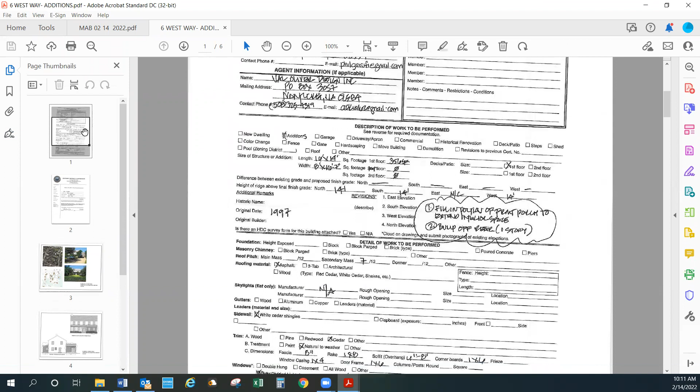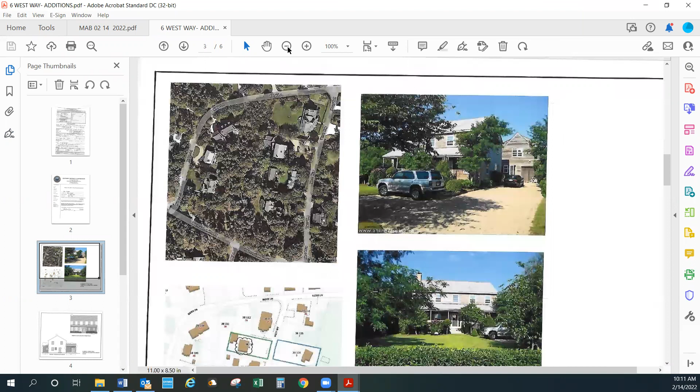Okay, he is adding an addition on West Way. Yeah, there are 2 additions on the house. Yeah, I know this house. I have no problem with it.

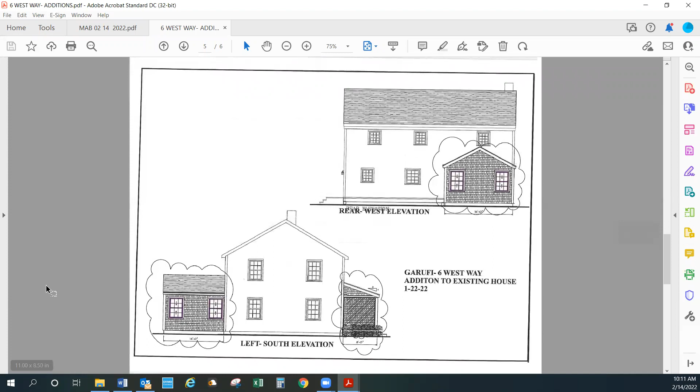Okay, might as well just roll through here for a second. Esmeralda, you got to move it to the left because for some reason my block of people's faces always blocks that right-hand side. Okay, go down one more. Do we not have all 4 sides here? Yes, oh there we go. All right, nobody has any concerns? I reviewed it and have no problems.

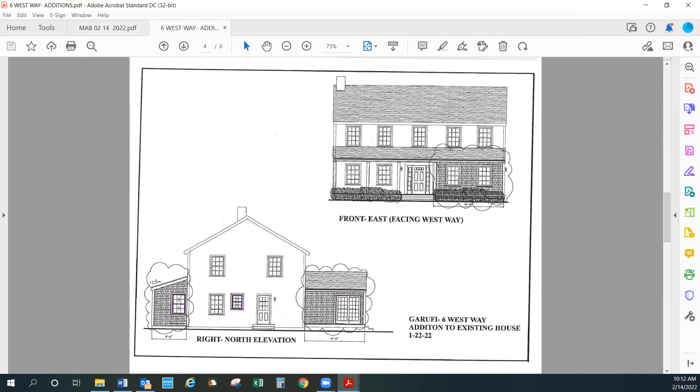So sorry, does somebody want to make a motion that we have no concerns? So I'll make, moved, this is Tom. I'll make a motion that we have no concerns. Okay, is there a second? Okay, all those in favor, Tom, yes. Bruce, yes, and myself, okay.

All right, number 2, we got 3 things going on here, on Washington Ave. Yeah, that's Bordis's house, you know, that big crooked house, just down by the boatyard. Yep, okay. What are we seeing? What's up here first, the pool? Correct. There is the pool, window well, and a new garage.

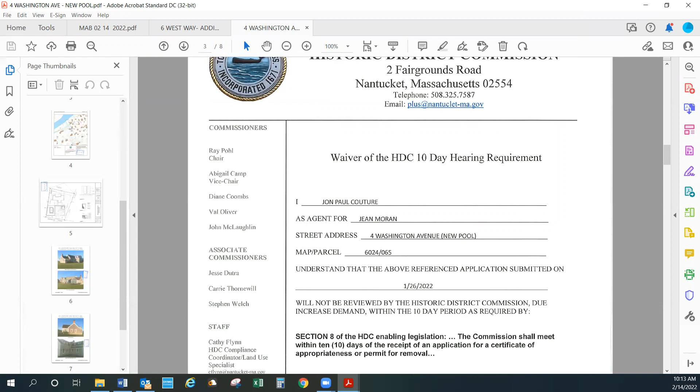All right, let's go to, what zone is this? Can you go back to the application page? Yeah, all those houses, Moran's, all those houses are owned by the family. Are they owned by the family? Oh, he was already here.

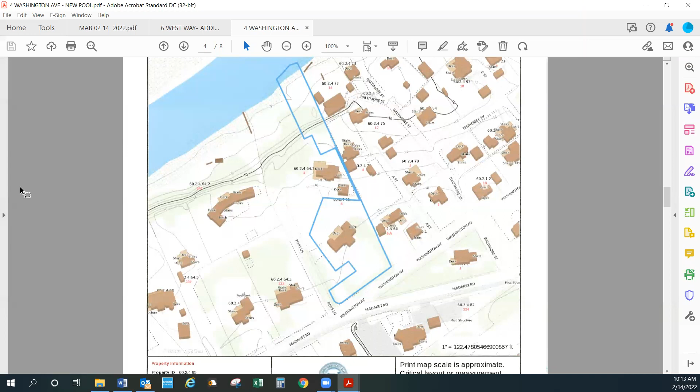Yeah, coming back to the application page for a second. Actually, talking about that particular thing. Oh, was it? I got a voicemail from him saying he can't get on his computer for email. I said, go over to VR, they're gonna have to go to the zoning board for that. But we'll look at it.

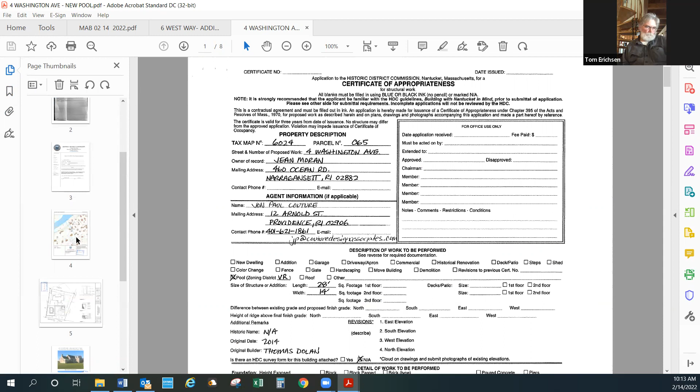All right, the site plan? I have a lot of background noise. What's going on? That's in Esmeralda's office. It's almost impossible to keep the noise out because she's in the office with other people. Cool.

This is what are you looking at first, the pool? Yeah, okay, I have several issues with the pool. All right, let's stay within our lane, go ahead. Number one, the pool has to go to the zoning board, correct? Yeah, but it doesn't matter what we do, the zoning board's gonna make it go to us before it goes to the zoning board. I've already been through this 4 times out there.

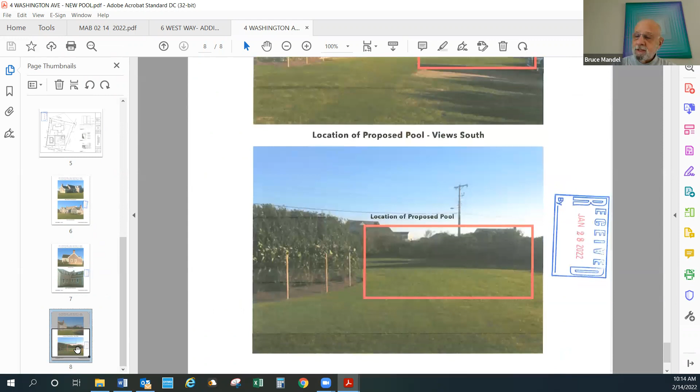Okay, number one, the plan calls for the installation of a 5-foot-high chain link fence supposedly concealed by non-indigenous privet. So I got two issues with that. Number one, that kind of a fence is visible and it's not in keeping with the neighborhood. And the fact that they're going to plant some non-indigenous privets around it, they don't say whether they're going to be small and then grow over the years or what, but it just is not consistent with what we're trying to do in this neighborhood.

Would it make a difference? Hold on, let's stay on one thing. Would it make a difference if it was year-round plantings?

I agree with Bruce. Year-round planting, a privet is year-round. No, it's not. It's only good for three months of the year. Oh, I didn't know that. Well, that's another factor.

They should definitely have those bushes around the chain link fence. What they mean by chain link fence is that this is pool fence embedded into a hedge, and everybody uses it here without having to put a big heavy duty fence around. Everybody's using this webbing in between all the hedging. Problem is that it's in privet, which is going to be useless.

If you go to the detail in the upper right-hand corner of this drawing, Esmeralda, can you drop it down? Move it to the left. Yeah, see, this is normal. They put this pool fence in between a double row of privet. However, most of the year, it doesn't do jack.

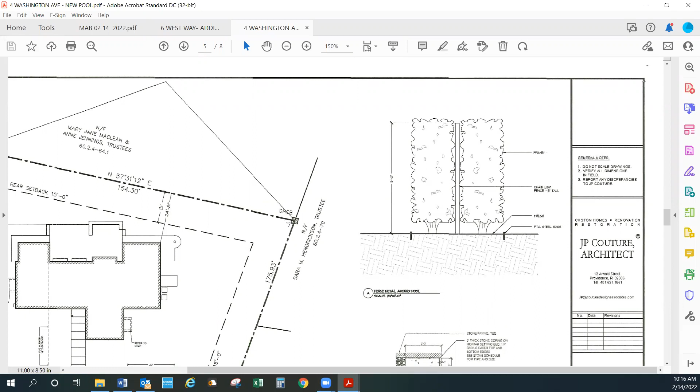Not only that, but Linda, that's not around any fence. That's not around any pool that I have seen in Madaket. I've seen it, but it's usually not on the road side. That's the biggest issue - it's on the road. It goes around the front yard, around the pool, and all around the rest of the area.

Well, does anybody besides me have a problem with where the pool is located? I don't think they can locate it anywhere else. I don't care - the pool is visible from Millie's, and it's visible from the neighbors.

This property is kind of growing by, I would call it, surreptitious, segregated, separated applications for growth on the property. And this is just one example. They can't put them all on the same application. You can't have hardscape on the same application with a structure.

Well, I understand that, but we'll get into some other details later. The thing is visible from Washington Avenue. It's visible from the neighbors, the abutting houses. There's no indication here of where the mechanical equipment is going to be located. Is it going to be in a single enclosure?

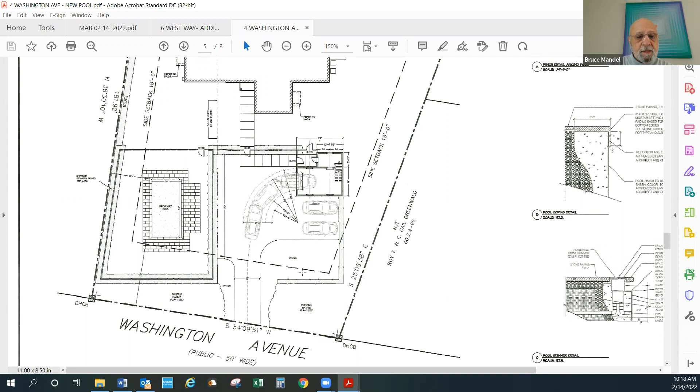I'm not sure if it's in our bailiwick, but the pool coping is built within the front setback, and it should not be. Oh, it can be. The only thing that can't be in the setback is the pool itself. Yeah, that dotted line is the setback. That's right, it doesn't matter.

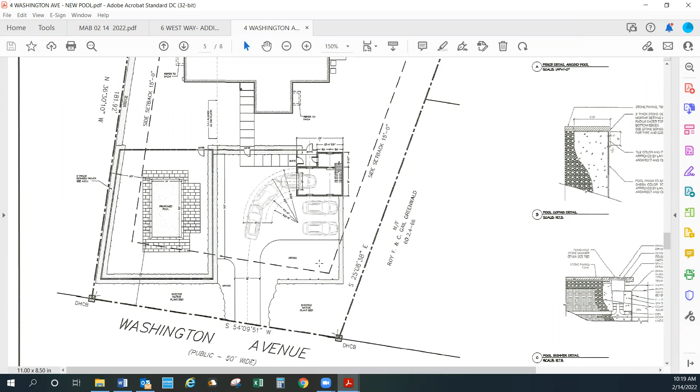You can have - I'm more interested in what the hell they're showing here. If you look at it, they may own a little bit more property than what's on the GIS. If you go to the GIS - Esmeralda, can you go back up to the GIS map?

You see this here? Do they own the piece next to it also? Because their map goes flush to the street, and this one has all kinds of little wonky stuff going on. And that's why I went back to the GIS map a second ago on my computer. There's something really weird going on with their site plan. They've got a little sliver that gets them access to a large piece of property that fronts on the creek.

It's 0.99 acres. Well, how is their site plan - take a look at the site plan again. How is their site plan straight to the street without that jog? Where is this pool going? Is it going in that little piece down there on the left by itself?

You see what I'm saying? See, the house is way back here. Yeah, it jogs in, jogs back, jogs out.

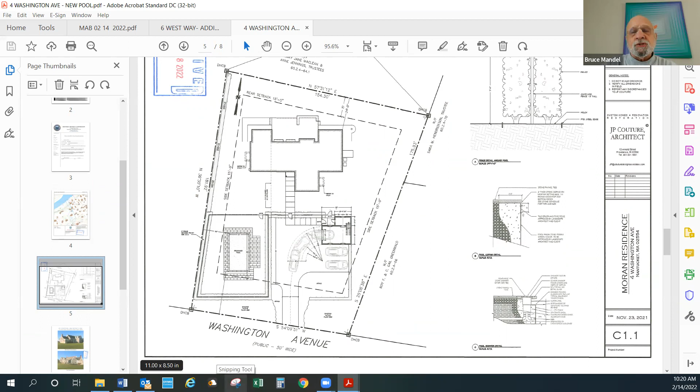Now look, go back to the site plan. That GIS map might be wrong, because I just checked it. Well, the problem with the GIS map is it doesn't show the full width of Washington Avenue and Pops Lane. But you're right, it's skewed. I think the design folks have made an error, big time.

Well, this site plan, if you go back to the GIS again, I just looked at the people that own the piece to the left where the jog is. I looked at this big piece right here, yes, and they own all the rest of this. Everything to the left, the two houses to the left and that big bended house, they're all, and the one behind it, it's all family compound.

Not part of the Morans, is it? I think it is. The name is different on the GIS completely. Well, I think it's part of the family. I don't care if it's part of the family. It doesn't match, the site plan doesn't match the lot. So we should ask them to correct the site plan.

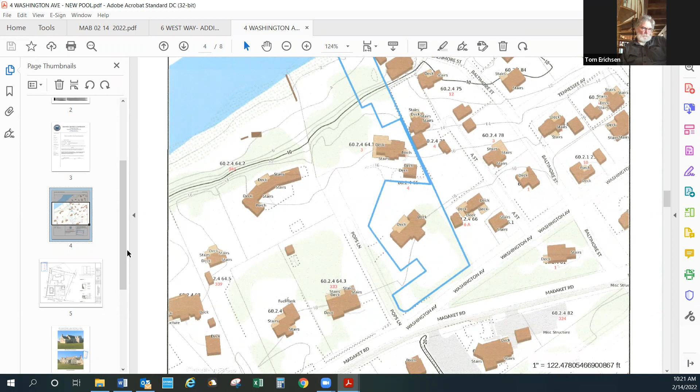I just don't know what happened here, unless if they did that they'd lose their frontage, unless the family gave them a whole piece of property. Go back to the site plan again. Well, Linda, there's the possibility that the data in the assessor's office used for the GIS is incorrect.

Not that incorrect. They don't own that lot next to them. That would straighten this lot out. They don't own to the left of them. I agree with you, I think it should be revised and resubmitted. I agree with that also. Yeah, and I don't think the house is where it's supposed to be. Who did this, some architect?

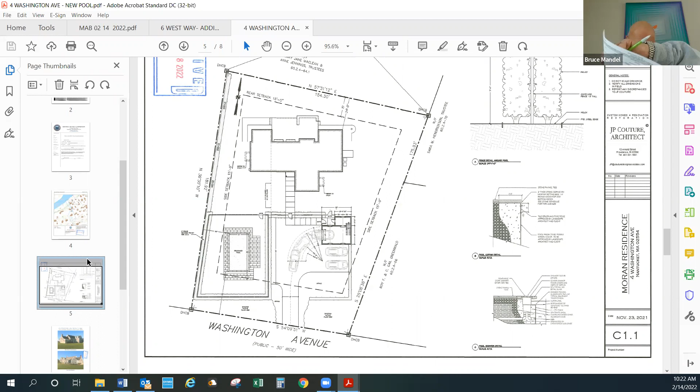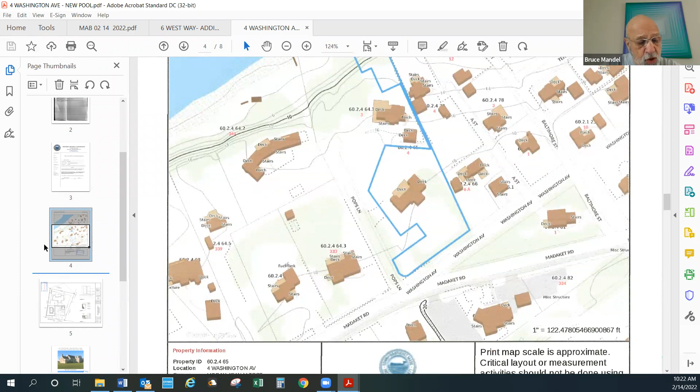Yes, it was done by Moran. Actually, Linda, even though Cantu is agent for Jean Moran and that's part of the Moran complex, it appears this was done by something called Couture Design Associates in Providence, Rhode Island, by John Paul Couture.

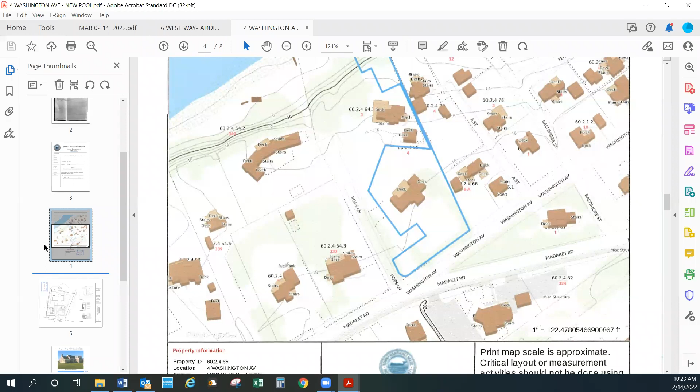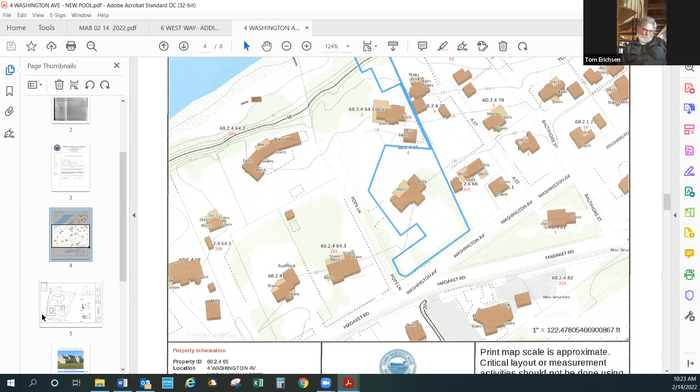Well, we have no idea whether this line from the house goes straight to the street, as opposed to this wackadoodle jog, because right where the jog is is where they're putting the pool. We should ask them to revise that, because the house is further back on the lot than what he's showing. Well, we should ask him to clarify it and correct it. Let's go back to the site plan again.

I agree with Linda. How is that possible? And plus they have a solid line in the back, and that's not correct, because we both know it goes all the way back to the water. So this isn't even correct. Well, I agree with Linda also.

But I think the other comments about the pool are appropriate to make relative to what they presented to us. I'll just say the coping, which can legally be in the setback, the coping's in the front yard setback. Yes, it is. There's no mechanical equipment shed or enclosure depicted. Can you enlarge this a little bit, Esmeralda?

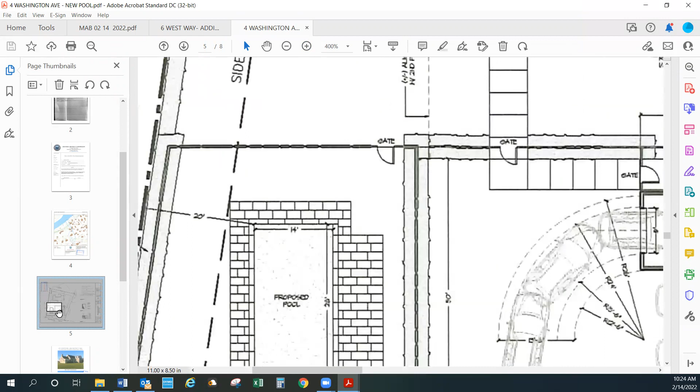And we've got an issue with the fence. I'm just looking at that structure on the right. So we should ask them to amend the GIS and also the pool mechanical room. And I'm wondering, I know they have to have a larger setback out there in Madaket. The front setback, I think, is 20 feet.

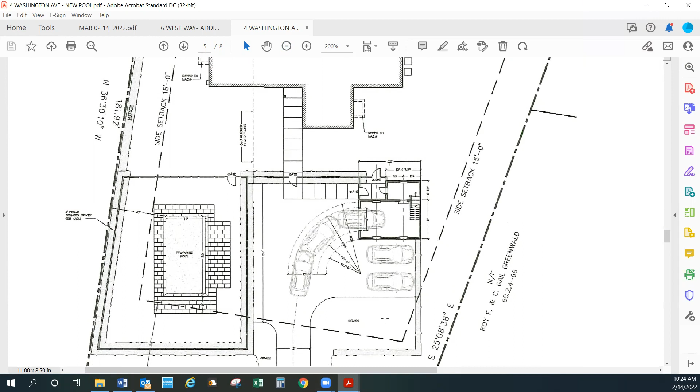No, I'm talking about the sides. I know there's, in the VR zone, other regulations. I'll check them before I put in the application. I think it's 50 feet, Linda, but yeah, we should check on it. I'm just having an issue with the pool where it's located, right on the road. Yes, well they're trying to conceal it with that 5-foot-high chain link fence.

And you know, I know you're familiar with the kind of plasticky, greeny thing, but that's not what this is, this is a cyclone fence. And you know, it's right there, right across from Millie's. I mean, that is a really heavily trafficked area. Yes, and people park on Washington when they go to Millie's. Yeah, but we're not responsible for that lunacy out there.

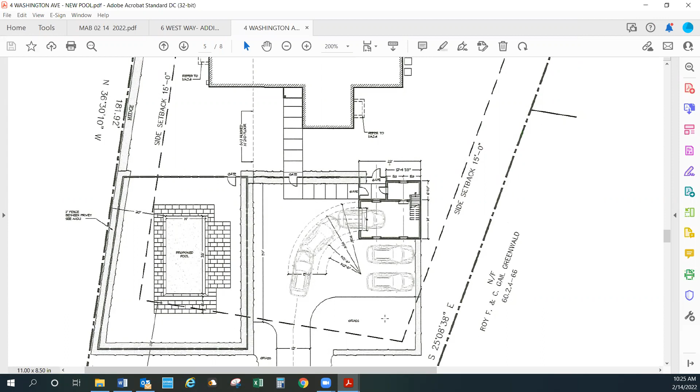No, but my point is, it's going to be very visible. It's right at the intersection of Madaket Road and Washington Avenue, right on that point. Can you go down to the fence details, Esmeralda? It's on the upper right-hand corner of this document. There it is. No, that doesn't really give it to you.

And chain link is not something we use. It's more of the pool fence, which isn't really, it's black vinyl. Did they say on the application, Esmeralda, what color this fence is?

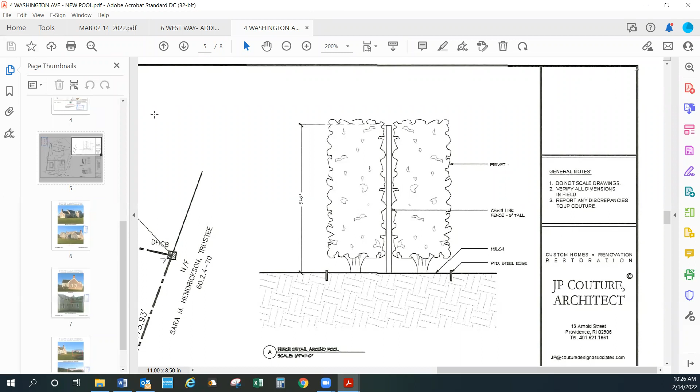It says black vinyl pool fence, but I'm not sure what he's got here. Should be green. Well, no, they use black vinyl, it actually disappears. But a chain link - that's not a chain link fence.

Stay right there for a second. The application is incomplete.

In the fence detail, see the little block on the right? There's no fence detail. There's no height, there's no length, there's no color, there's no material. And that has to be filled in.

Down below that, a little bit further down on the application, Esmeralda, there's no detail. What is it with these people? No detail about the hardscape, the patio surround.

One of the biggest issues, again, as you said, is the pool equipment. This application should be rejected because it is incomplete. I don't know if you were able to do that, Esmeralda, in the office and give it back to them, because it's not complete - because people are taking applications in, as you know, that are not complete. And all they would have had to do is look at this and say, not happening.

All right, okay, what else do we have for this one? There are two other components to this application that I think we should quickly review.

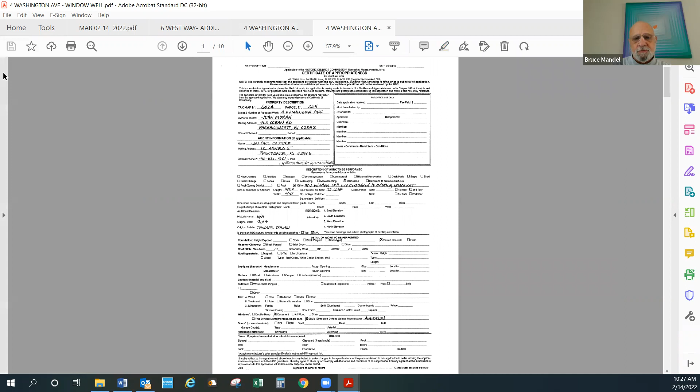Can we go down to the pictures of the property while you're talking? Right there, and then down one more. I don't know if they have enough room to put it in behind the house.

I have no problem with the window wells, because they probably just want well light. I've got to stay on one at a time because I have to take the minutes and then try to transcribe them.

What else we got going on here? Millie's is way over here, Bruce, way to the left of that, way over and down the hill. I'm working on the property that gave Millie's back to the town. That's way over there.

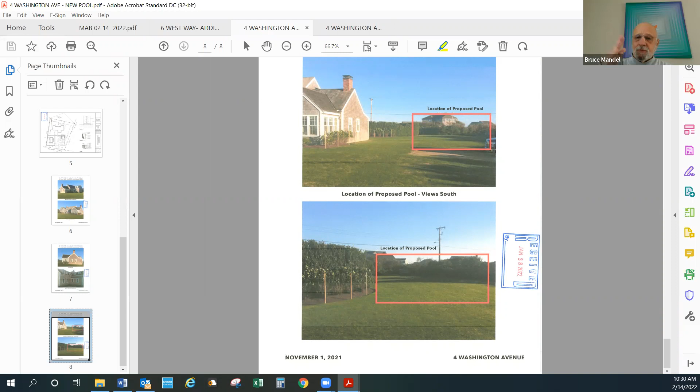I make a motion that we do all that. I'll second that. Okay, all those in favor - Bruce, yes. Tom? Aye. Okay, unanimous.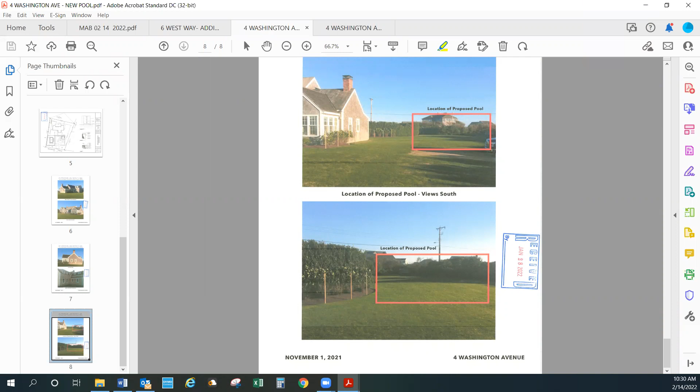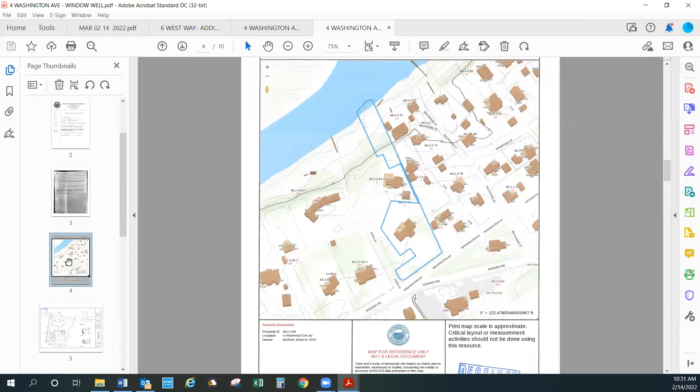Okay, what's the next one? The window well. Let's pull it up. But the problem is it's the same site plan, but the GIS is wrong, just like the first one. So I think the site plan is wrong. We should send that back and have them revise it.

All right, where's the application? Stay on that plan for a moment, please. Same stupid stuff here, I guess. Pull out, it's just a few little window wells.

We don't care about that, but the issue here is these windows make what had been previously filed as unfinished basement into a 3-bedroom apartment. Not our problem, we can't say anything about that. If they want to put living space down there, they're going to have to deal with the health department and everybody else.

Is the application complete? I don't know, we got to go back up to the top. All we can comment on is the window wells. We don't know what they're gonna do in the future. I have no problem with the window wells, but I think the site plan is wrong again. Let's enlarge this a little bit, please.

New window well. Okay, casement, double hung, simulated divided light. No one's gonna see them. Go down a little bit more. Go down.

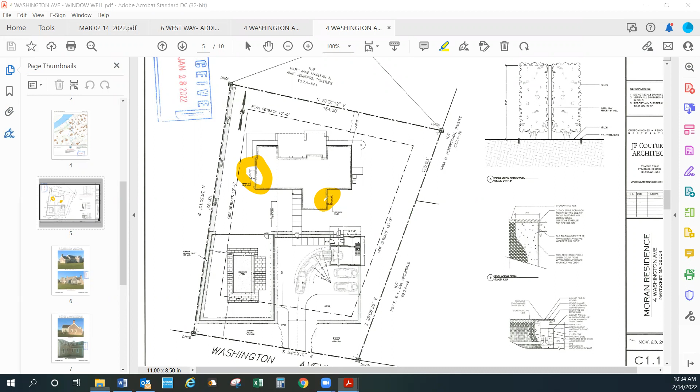Okay, all right, all those in favor? Bruce, yes. Tom, yes. And myself. Okay, this one's into a world of hurt here. The next thing is the addition, the garage, no it's not, it's a new garage. Yep.

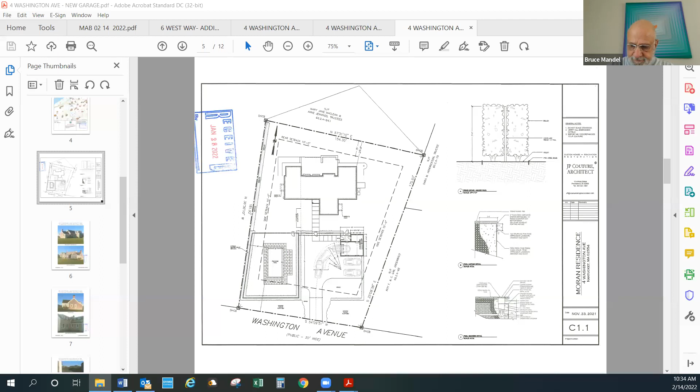Okay, let's stay there for a second. Is this the new one, Esmeralda, or are we still on the window well one? No, they use the same site plan for all three applications, Linda. Jesus Christ. All right, same site plan. First thing is the site plan again is wrong. Yep, and same comments about the application.

Let's go back up to the application page. Also, just stay there for a second. Okay, I have a question, Linda. Yeah, hang on a second. It's incomplete. They didn't fill in the grade part. I know it's flat, but they didn't fill in the grade part. They didn't fill in the height on all four sides.

Who is this guy? Probably not familiar with what needs to be submitted. Okay, hold on, there's no pitches. There's no what? Can you enlarge that a little bit, please? Okay, foundation, pitches. Let's see, what else is he missing here?

I don't have any problem with the garage, but I do have a problem with the site plan. Yeah, and we have a problem with the fact that it's not filled out. Go down to doors, doesn't have those on there either. He doesn't have the profile on the windows. From the road, all you can see is the two windows on the bottom and the little three windows on the top facing the road.

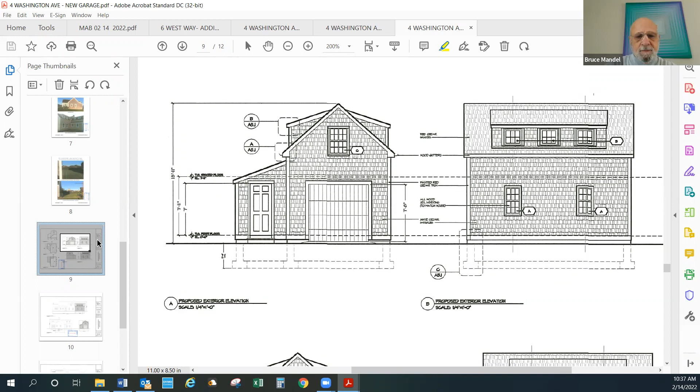Go down to the other elevations. On the face of it, now hang on a second. For God's sakes, who is this guy? There are no dimensions, guys. I know, it's terrible. That was one of my issues, the lack of proper dimensioning. There should be dimensions on the left side. There's no pitches on anything. Who is this person? Esmeralda, have you ever dealt with this guy before? No, I have not. I think this is the first time I've seen his applications come through here.

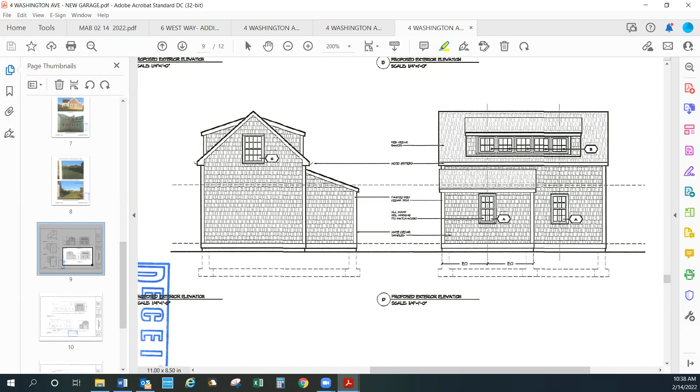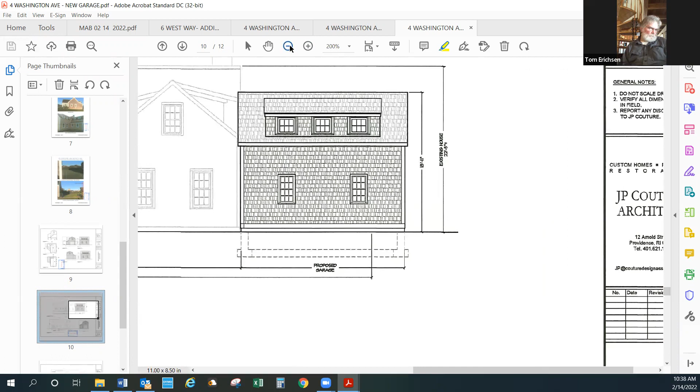All right, go down to the next page. Does he have dimensions on this one? There are some, but not much. They basically only show the height, but that's it, isn't it? There are dimensions on the right side. Yeah, I see that. There are no widths of the structure. As Linda said, it needs to be completely dimensioned. And the people door is too tall, guys. I don't know how tall that door is. Do we have a window schedule anywhere on here?

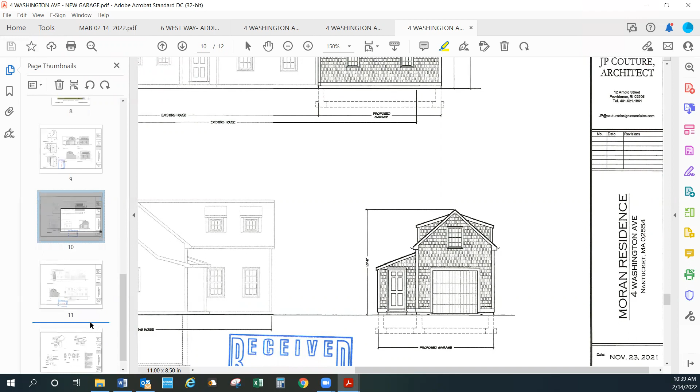Esmeralda, go down one more. There are dimensions on the one that shows the car and the garage. Okay, is there a door schedule here? No. Oh wait, I just see window. Yes, on drawing A5.1 there's what looks like a window schedule, no door. So there's no door schedule. And that door is too tall, the people door is too tall. It's probably the same height as the garage doors. That's insane. And we don't know the dimensions of the door, we have no idea how big it is. I know how big it is, but there's no dimensions on it.

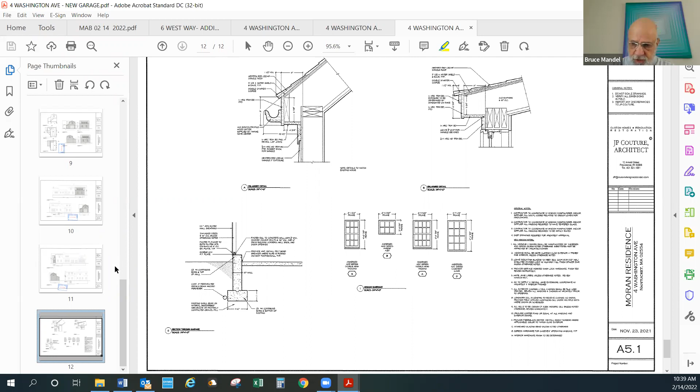Linda, I want to ask you a question I think you'll be able to answer. They're building a studio apartment above the garage. Where's the floor plan? Can we go back up to the floor plan? What does that say? That's not a studio apartment. It says studio, but in our vernacular here a studio is not the studio in New York City.

Let me ask my question. Does that need an exterior stairway? No, it's not a residential structure, it's an interior stairway, and it can't have an exterior one. Okay, thank you, that was my question.

Only if there's an actual kitchen up there and it's going to the planning board as a secondary dwelling, which this is not. They may illegally use it for that purpose, but that's not our problem. We'll get to that on a different submittal. That's the building department's problem, not ours, and it's a health department issue too. They're not going to allow it there anyway. Only the design is our problem. The design is ours, but we have nothing to do with the inside.

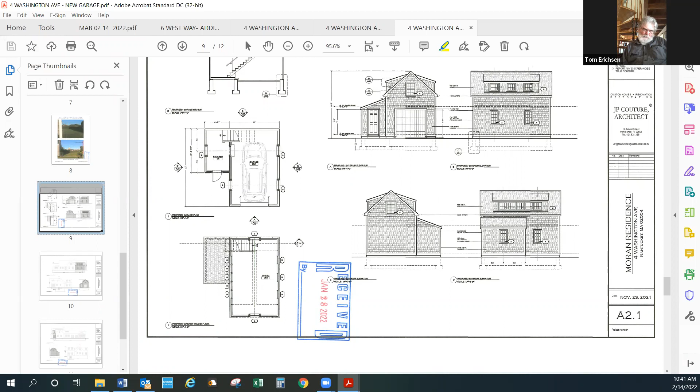Well, that's why I was asking whether an exterior stair was needed. No, only when it's an actual secondary residential structure with an interior stairway. All right, so somebody want to make that motion based on everything we just said? So made. I'll second. Bruce, all those in favor? Bruce, yes. Tom, aye. Okay, myself, aye. Well, why do we keep getting these?

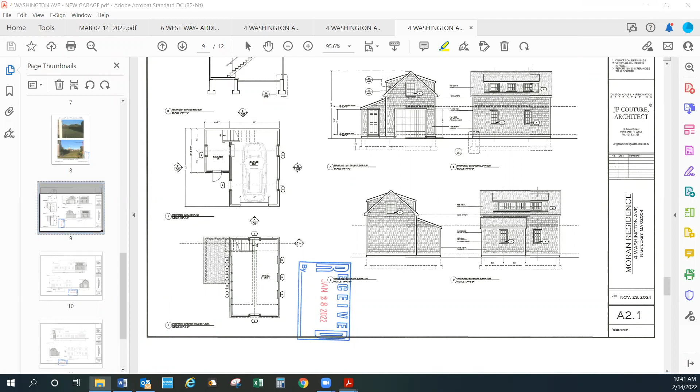Problem child. All right, now we've got 301 Madaket Road. There are two applications. The first one's going to be the demo shed, new shed.

Do we have any problem with removing a shed? No. I have no problem. Is the application complete? I don't know. That's an interesting looking shed, though. It's been there forever. I have no problem with the demolition. Well, here's a question, does anybody know how old that shed is? Very old. Well then there may be an issue. Hold on, I'll tell you. According to the field card, it was built in 1955. Rare. According to the field card, which I printed. I'm looking for that myself.

Single family MO, year built 1955. No, that's the house, not the shed. I don't think the shed is filed separately. Oh yes, it is, every structure on the property. If it's a structure they can date, they date it. It's not dated on the card and we can't go off the house.

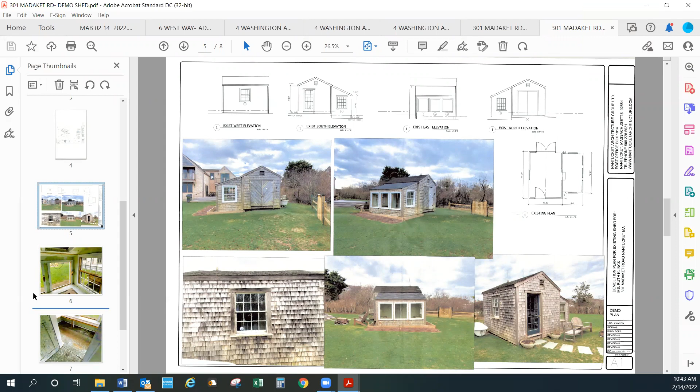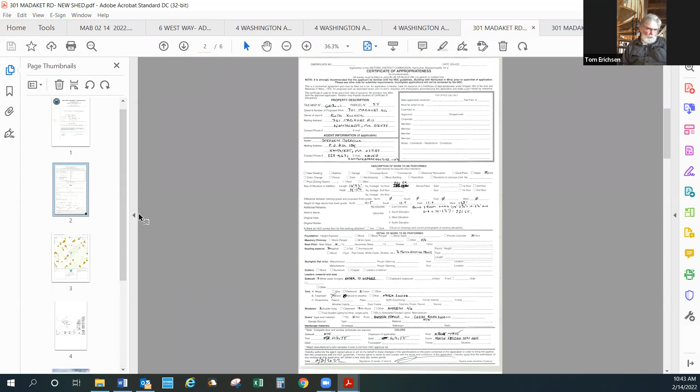Okay, my comments are- hold on. Let's look at, oh, they've got a pretty complete application page. Yeah, it's pretty complete, it's got the dimensions, it's got the window and door schedule. It looks pretty good, it's just a little shed. Yeah, it's kind of weird.

Can we go to the site plan? I don't know why they don't. There we go, it's roughly in the same place. Yep. Yeah, anybody have any concerns? It's funky, the pitch is kind of bizarre.

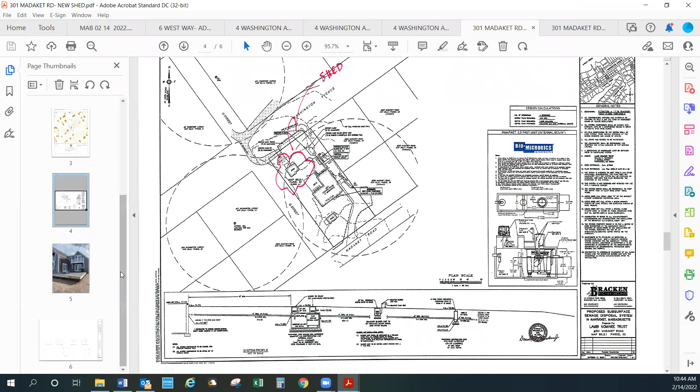I have a comment, please, Linda. All right, hang on. They should add pitch to the drawing. There's no north-south, obviously, that I saw. Yeah, there is. There is, north and south, east, so I really don't have any concerns. All right, go back up for a second so I can see what the pitches are.

That's the thing that's troubling me, is the pitch. Oh, you want him to revise it and send it back? I'm just looking to see what it is. It's a 6 pitch, that's why it looks so odd.

Now, normally, guys, do they have the colors below? I hate it when people keep saying to match existing, but you have no idea. There we go, it says natural to weather. Oh no, they crossed it out. Yeah, they're matching the house. Not a big deal. Colors, um, white, white.

The issue may be the pitch. They've got a 6 pitch, which is why I was looking at the pitch. And normally we don't allow anything less than a 7 pitch. So we can just sort of point that out, if they want to go with a 6 pitch because it's so small. What are the dimensions on this thing, about right up at the top?

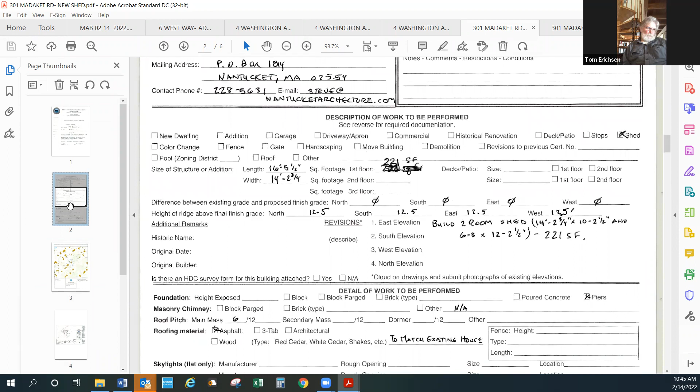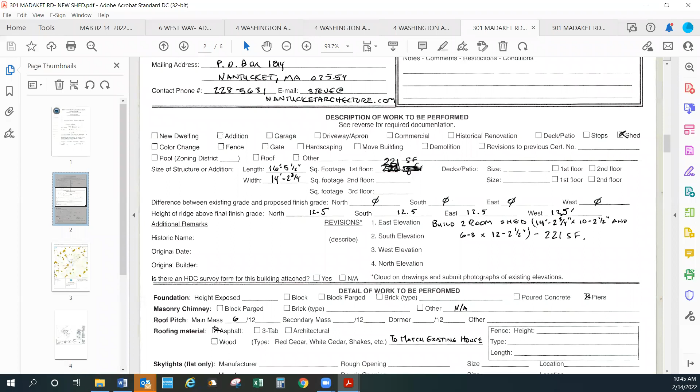We should make a recommendation to raise the pitch. I think so, I think the 6 pitch is what's bothering me. It's throwing it off, nothing else about it throws anything off, but it's throwing it off. And it's not a zoning shed, it's 221 square feet. So it's not a zoning shed. So it's not even a shed.

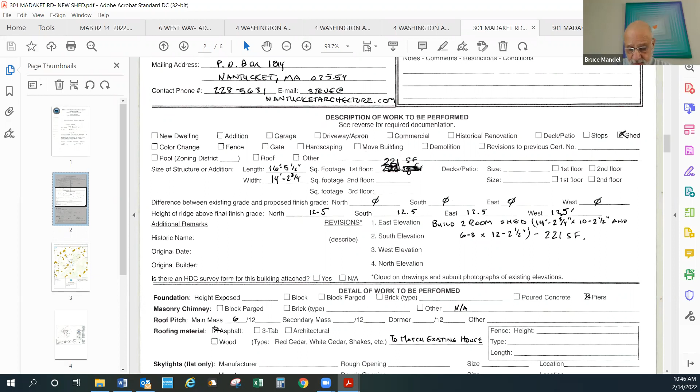This is an apartment, a guest apartment. It's got a sink. It's got a pull-out couch. It's got a dining table. Well, that's not our purview though, not our problem. But can you enlarge that so we can see?

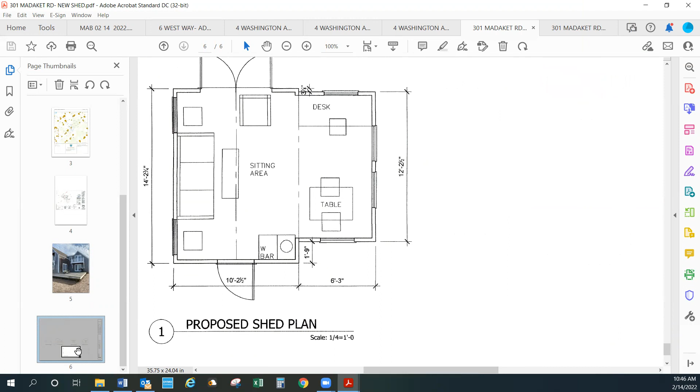Should the description of this be a shed? Yeah, it's a shed for all intents and purposes, for an exterior thing. No, the site plan, the floor plan, there it is. They can do their little thing out there, they just can't put a stove and a bed in there. So we're not talking about pull-out couches, it's a studio and we don't care about the use. For our purposes, from the exterior, it's a shed.

Okay, otherwise exterior, except for the pitch, do we have any issues with it? That's the only concern of mine. I agree with you, Linda. Yeah, it's just too flat. And it's got a tail on it. It just looks weird, not having the right pitch.

All right, Tom, you want to make that motion? I'll make that motion. Okay, Bruce? Yeah, I guess I'll second it. It's just annoying as hell to me that we have this density creep in Madaket, and it's okay, well, it's smaller than the one that's there.

So it's not really a density creep for us to be concerned about. The one that's there is not used as a guest house or secondary structure. It's not a secondary dwelling and it's not a guest house, it's a shed. What they do inside it, other than those uses, they want to put a sitting area. It looks like he's got a desk there. If he wants his own little place to do work, that's not our problem. They'll have to deal with that at the health department.

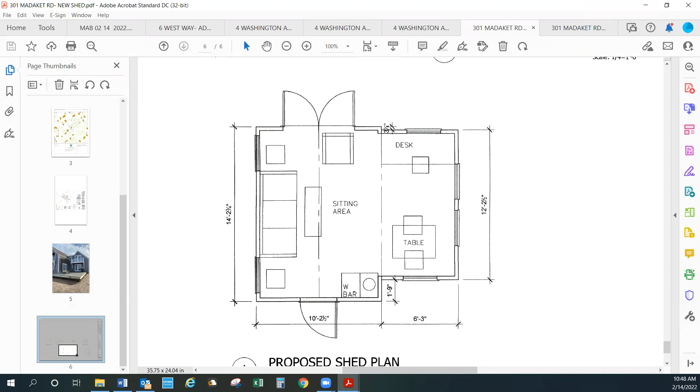Okay, we got here 14 Oakland. I think 14 and 40 are the same ones, basically. They're both owned by the Borders family. It's way down the end of Tennessee by the boatyard. Yeah, we got to take them separately.

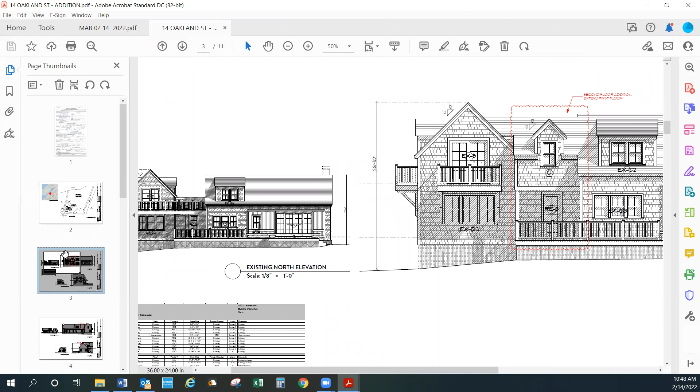Okay, the first one is 14 Oakland. Yep, we got an addition going on. There's a couple little bumps here and there. And the north elevation is the back towards the water, even though we do have that purview also. This is a conundrum. You can just see the roof elevation from the front, the additions in the back.

Yeah, let's go to the next page. Well, it can certainly be seen from Hither Creek. Here's the problem: it doesn't read as an additive mass anymore. They flushed the wall, they flushed the roof almost. They're taking away the additive mass, making the main mass extend, which is throwing this house off. On the first sketch, see the existing on the left, that little U-shaped notch? They're filling that in, but they're flushing the wall, which means there's no additive mass. This is one big solid mass now.

If you look, they do, if you look at the ridge, it does step down. Not enough, because if you look at the wall below, it's flush. I think it's required to step down 6 inches or 1 foot. But the wall has to do the same thing and it's not. Who did this one? Yeah, I know what you're saying and I agree with you. Botticelli and Pohl.

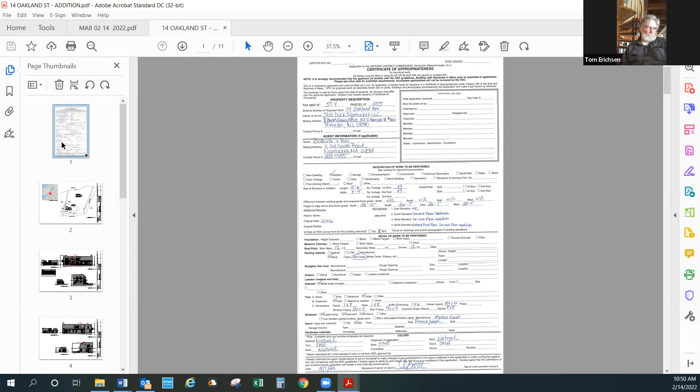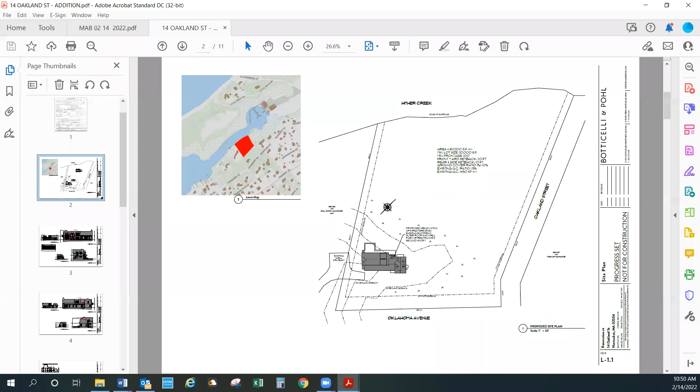Can we go back to the site plan for a second, please? Page 2, yeah, the next one, site plan. The one with the red box? There we go. I don't mind them getting a second floor space out of it, but I'm having a lot of problem with flushing that front wall. How about the floor plan down below? You can see where it's flushed. You see it goes straight across now? It doesn't jog in enough. See the floor plan up on the upper left? They're filling in the porch and flushing that wall straight across.

Even though the roof plane is the same and flush, it still has that step down. And on the lower part, there is the jog, from that lower part where that little gable is. Not enough. Let's go back to the first page of the elevations.

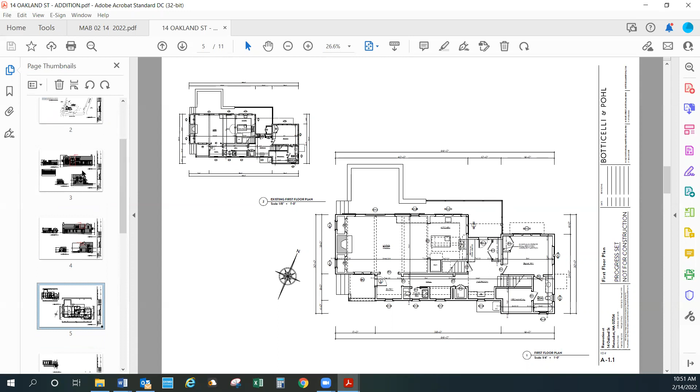Linda, on the floor plans, should the addition be highlighted or clouded for clarity? No, it should be, but not necessarily. They should do it the same on the floor plan, but they don't. A lot of people don't. But see this thing here? I don't know who approved that deck. We should have been shot. But besides that...

Obviously, the roof is not breaking. It's going straight across. It doesn't matter if they've dropped that bit, that dropped at 6 inches. If you look at the roof plane, it's going straight across, and that is just bizarre. Yes, I agree. Okay, I'll go along with that. I don't mind getting rid of that wonky deck. I don't think we approved it.

And it shouldn't be a gable dormer. Do you think that deck was built, or is it just on this plan and going to be submitted sometime in the future? No, if you look at the existing, they do have a deck, but the deck is extending to the right, which makes no sense. But it shouldn't be a gable dormer, it should be a shed dormer. Why are we putting a formal dormer in a little teeny weeny connector? Well, it's a gable. Oh, I see what you mean. It should be a shed dormer. Yes, it should be, and it's next to a shed.

What is that? Why is that? That's stupid. That's existing. Yeah, so the shed dormer is fine. Well, it sort of matches the same pitch on the existing gable on the left. It doesn't matter, it's a secondary element. It should be a shed dormer. They're adding a formality, a flush dormer, on top of it that they shouldn't be adding. But it's just bizarre the way they're doing this. This is weird. This addition, this little thing in the middle is just weird. I understand it's almost a flat roof element in between, but just put a roof on it then.

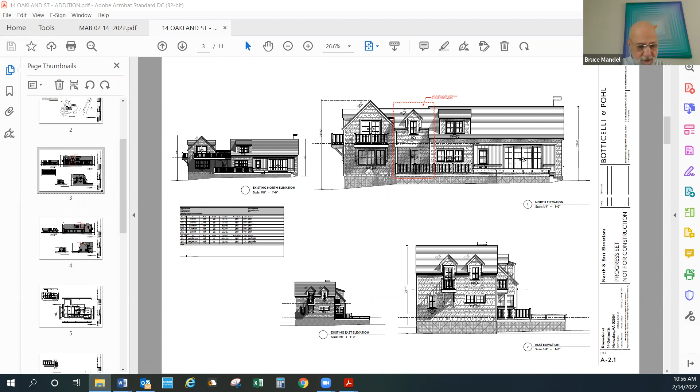What is it with people? God, all right, we got 14 Tennessee. That's the same number, also. That's another addition. Okay, let's go there.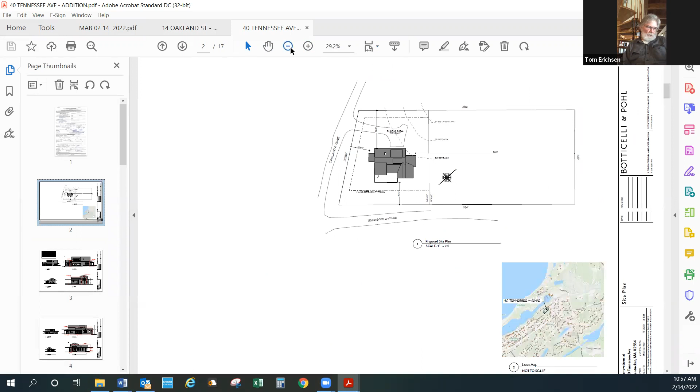Oakland Avenue on the left. We're not there, at the site plan on the screen. This one's closer to Tennessee Avenue, it's the corner. Right on the corner. Right under the application, you see the roof plan on the second page. Yeah, you have it there.

Okay, I'm going to scroll down and look at the addition. Go down one. They're adding a little deck on the second floor. They're adding a little covered stoop on the right. Well, they're adding an entire addition to it. Yes, and they're adding that big addition on the left on the third drawing down. Okay, let's go to the next one.

It's one of those weird little additions. Does anybody care? Well, on this one, it's all shed roofs like it was before, so this one looks better than the other one. Yeah, and a broken back, who cares?

All right, anybody have any concerns about this one? No, I have no objection. Bruce? Not... that pertains to how it looks. I'm not talking about use. I understand, that's why I said it like that.

All right, so Tom, you want to make a motion? There's no concern, okay, I'll make that motion. Bruce, second that motion. Okay, Tom in favor? Aye. Bruce in favor? Yes. Myself in favor. Okay, I think that's it.